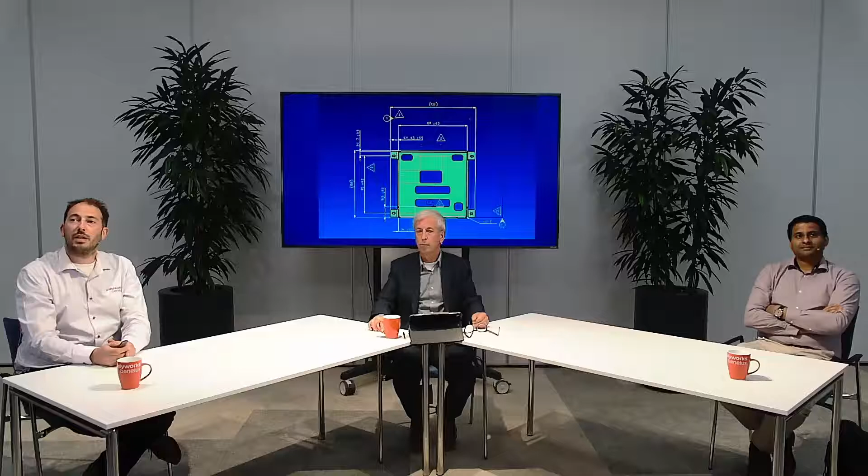I have a presentation, I guess. Some help. This is the model-based definition. This is the one I'm looking for. Yep, good.

Welcome. First, let me introduce to you what Polyworks is. We are a supplier of 3D metrology software. Not only 3D, also 2D, but our main focus is on 3D metrology software. We are able to use our software with different types of machines, different types of CMM machines, scanning devices, large scale, small scale, and we are trying to exchange or distribute the data so everybody can use it for a proper analysis of their parts. And the easier it works, the better it is, of course.

So if we go to the next sheet. Like I said before, we are a supplier of building blocks. In the process you have different steps: one is acquisition, another is the request of what kind of data you have. That's what we're talking about today with the model-based definition. But also the sharing of data, and also statistical process control, like Ajith mentioned, and FAI, or first article inspections. Those are all different building blocks and how we can get there.

The goal is, well, first let me explain who we are. We are Polyworks Benelux, located in the Netherlands. We've been active since 2015 with 6 employees, and we are a subsidiary of InnovMetric. InnovMetric is a Canadian company started in '94 with a global presence of about 500 people, and we have an active, direct presence in 21 countries. If we count also the non-direct presence, we are in about 30 or 32 countries.

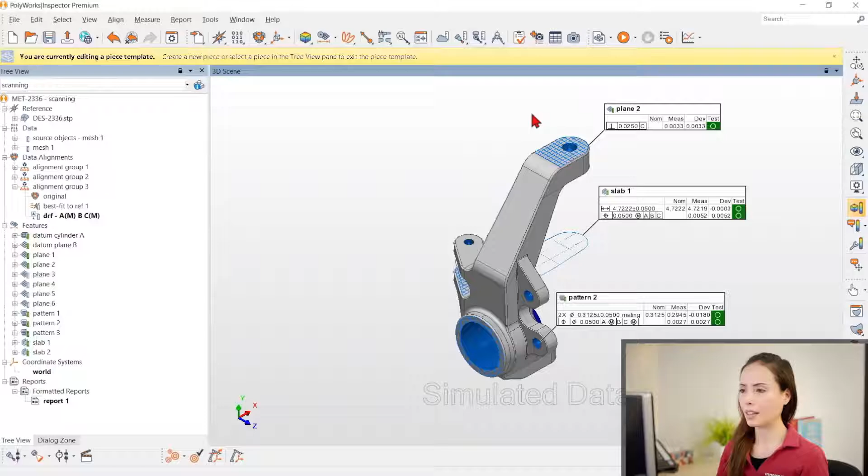As a senior application specialist, one of my roles is to prepare inspection projects based on engineering dimensional requirements and analyze the results once the parts are measured. Here, I have prepared a measurement plan to inspect the first 5 produced samples of this part, and I am targeting a portable scanner as the measurement device. The plan includes all the critical dimensions, the measurement steps needed to collect the data, and the inspection report is also ready.

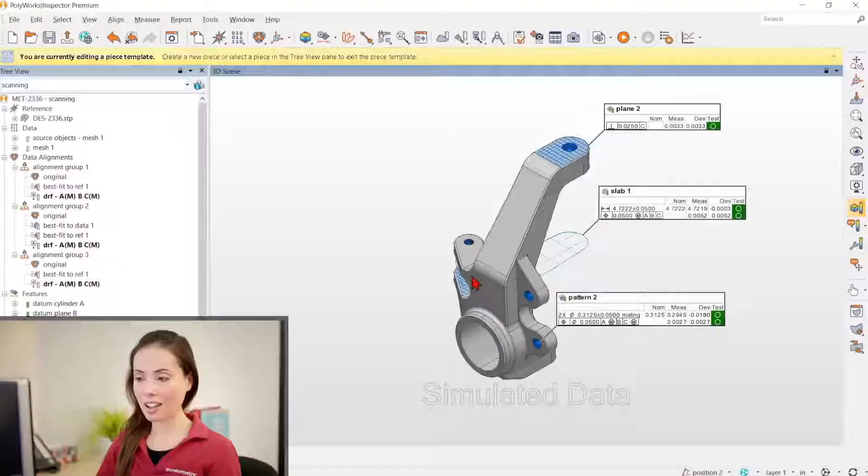To share this plan with my colleague down in the metrology lab, all I need to do is upload the project to Polyworks Data Loop. Being able to make my work available to my colleagues with a few clicks, without ever leaving the Polyworks Inspector interface, has completely changed the way we manage our inspection project files. I no longer need to put files in dedicated folders, keep track of versions, or validate that people involved have access to the files. I upload to Data Loop, and the latest version is instantly available to anyone involved in the process. And as if this was not awesome enough, I can send a direct link, in this case to Jeff, who will be inspecting the samples, to easily access the project and provide additional information if needed.

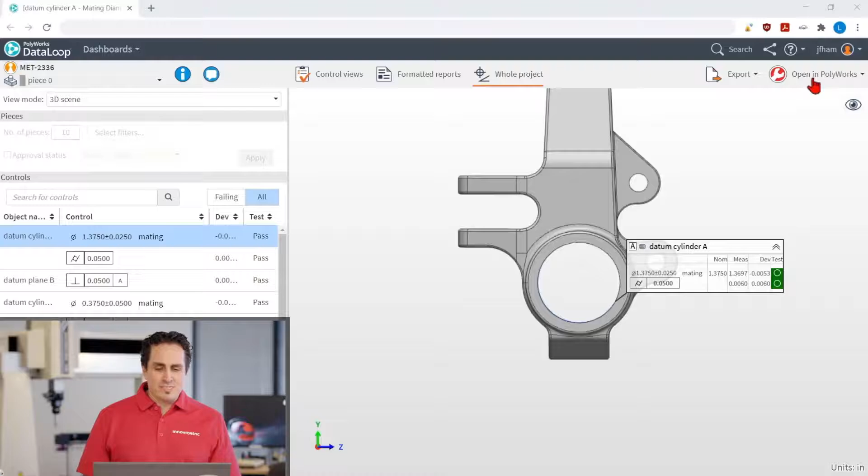Being a Polyworks application specialist means having the privilege to work with almost any metrology hardware that exists. I know I'm a lucky guy. I'm currently working on a project with my colleague Amanda to inspect some samples of this part. She was assigned to prepare the inspection project, and I will be assisting her in collecting the data. Oh, it seems she's already finished, and the ball is in my court now. I truly love these direct links to projects. I'm no longer browsing for files and making sure I'm opening the right file, or even the right version of it. I know it might sound lazy, but I don't even need to know the name of the file. I just click the link, and the project opens in the Polyworks Data Loop web interface. So, I'm going to get my hands on it right away.

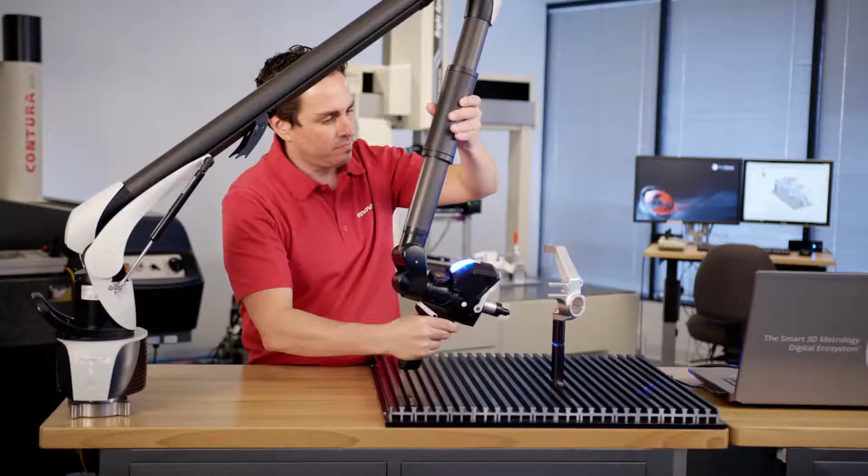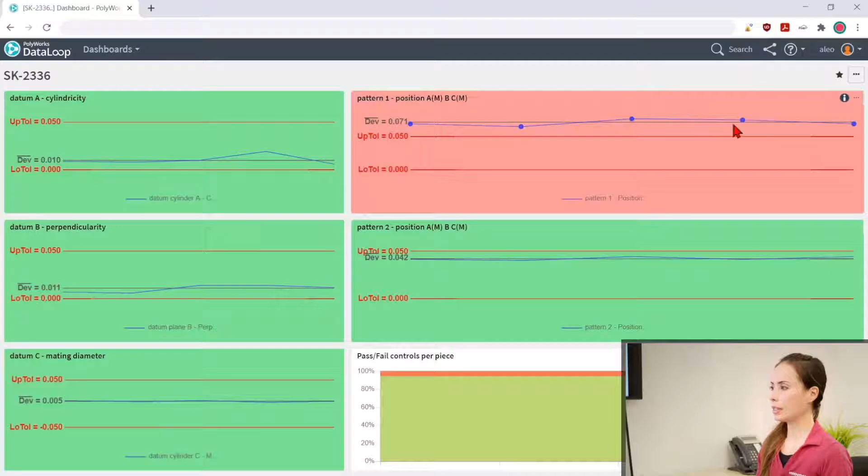While Jeff measures the parts, I have customized the dashboard in Data Loop web interface to closely monitor critical dimensions. This will allow me to see the results as they come in and quickly see if any are failing or on an abnormal trend. Now that Jeff has uploaded all the data for the inspected pieces, I can see most of the critical dimensions are good, except pattern 1, which is failing in all 5 parts. Let me take a more detailed look at this pattern. Yes, now I remember, these are the ones that were challenging to drill. I will alert Matt about this. Matt is the main contact with our suppliers when we need to manufacture parts and has a solid background in different manufacturing processes. He will help us determine what is wrong and what will be the best thing to do.

It seems we have a little issue with the first produced samples. Amanda is saying that some dimensions are consistently failing. Let's see what the issue is.

Yes, these holes are not looking good. I was afraid this might happen since our supplier had some initial difficulties setting up the equipment necessary to drill these at the proper location.

As of now, we know their position is failing, but to be able to correct this issue with our supplier, I need to know in exactly which direction these holes are deviating and by how much.

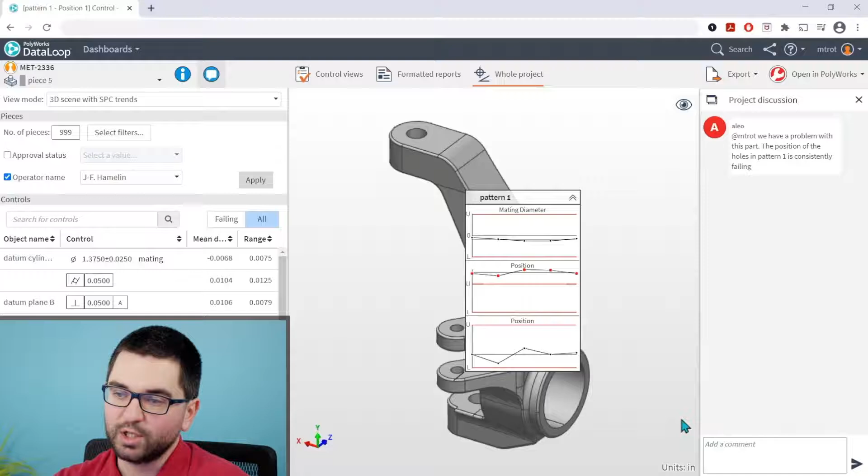Amanda is super cautious with her projects, and she's the only one with permissions to edit them. So I'll ask her to include the coordinates of those holes for all the 5 pieces.

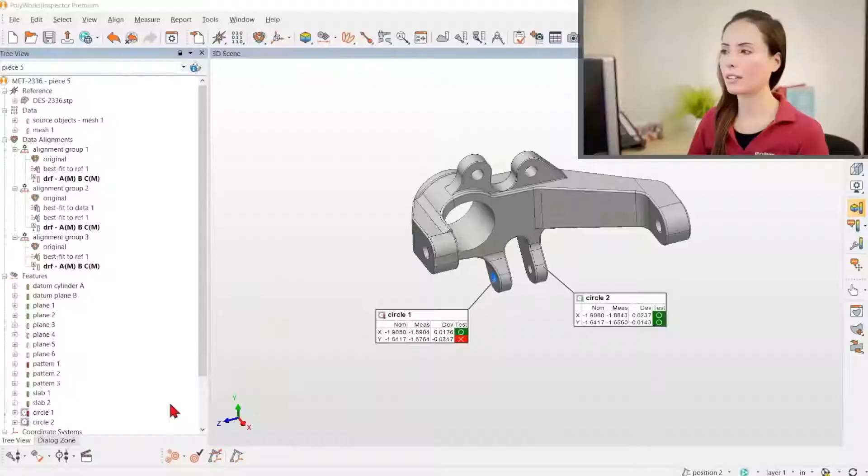As requested by Matt, I have added the values he needs to the current piece, and I can propagate these changes to existing pieces in no time.

For the record, whatever Matt told you about me being a control freak is not true. I'm just exploring the benefits of collaborating while being in control of the process at the same time.

Let me just add Matt to check these values.

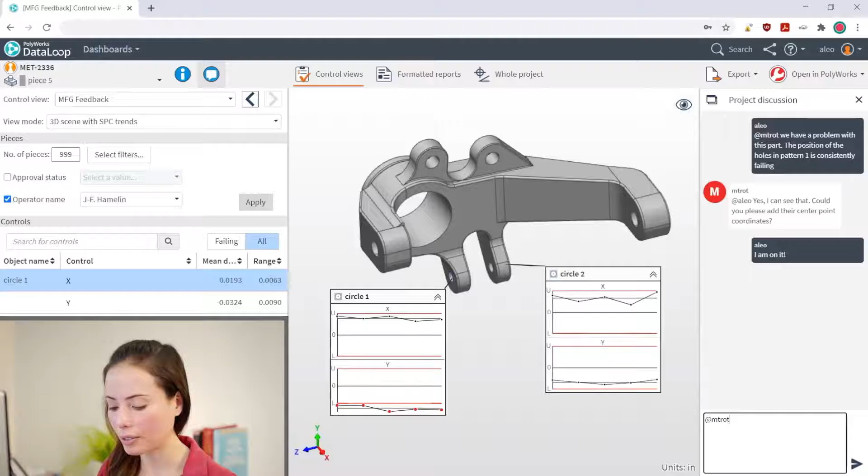Great! Amanda is so methodical. A dedicated control view. Well, it definitely speeds up the review, and I can confirm there is a consistent trend for the coordinates of the holes.

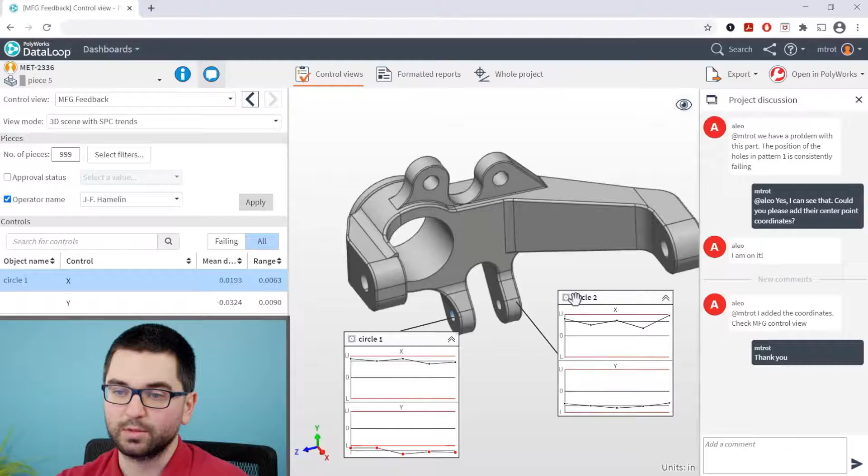I will tag our supplier so they can access the data and make the necessary adjustments to the process. They will be able to manufacture the next batch of samples with the corrections.

We have received a new batch, a total of 20 new samples to inspect, manufactured after the corrections. Having to inspect a larger batch of pieces, we have decided to use one of our CMMs to speed up the process.

I can adjust the original plan to inspect the new samples with it, and the assisted sequencing technology allows me to do this very quickly.

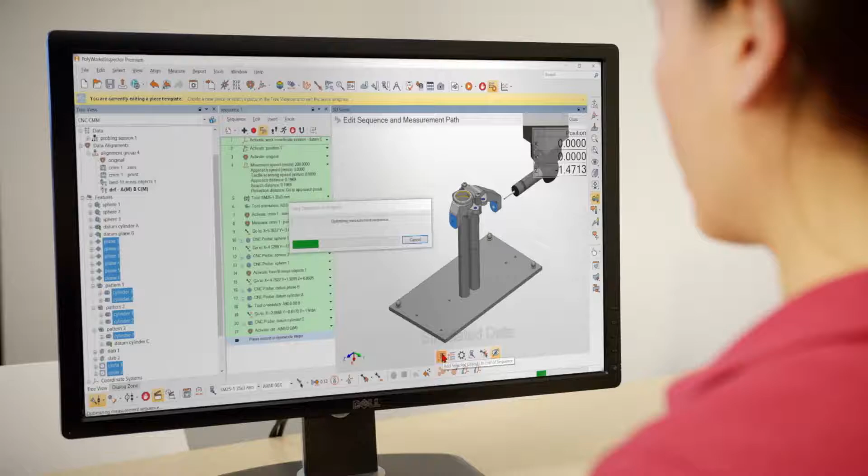I can update the project with an upload to DataLoop. And now Jeff can have some fun with the CMM.

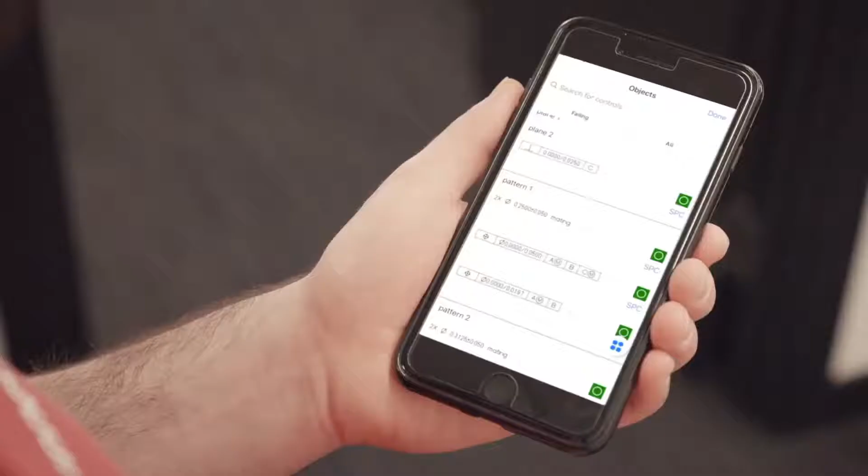It seems like the adjustments made to the manufacturing process worked perfectly. The position on the new 20 pieces looks great.

Thanks to the values provided by Amanda, our supplier corrected the machine path and was able to get the right position so we can move on to the next challenge.

Yes. Well, you just saw a video where we tried to explain the framework of PolyWorks and where model-based definition can be really beneficial. So what we just saw was the measurement request, the sharing of measurement data, but also quickly analyze that specific data, modify it on the request, and eventually, in combination with the supplier, change the part or make modifications, get new samples in and measure them on a different type of machine again.

And what is the big benefit for model-based definition in this case? To set up the specific question. Because you have to interpret the data from a drawing, you have to convert it to a 3D model.

Then you have to add some data to it and administrative tools like the bubble ballooning numbers, the GD&T stuff, the tolerances. That's quite labor intensive, and it's already been done. So that is a bit of a waste of your time.

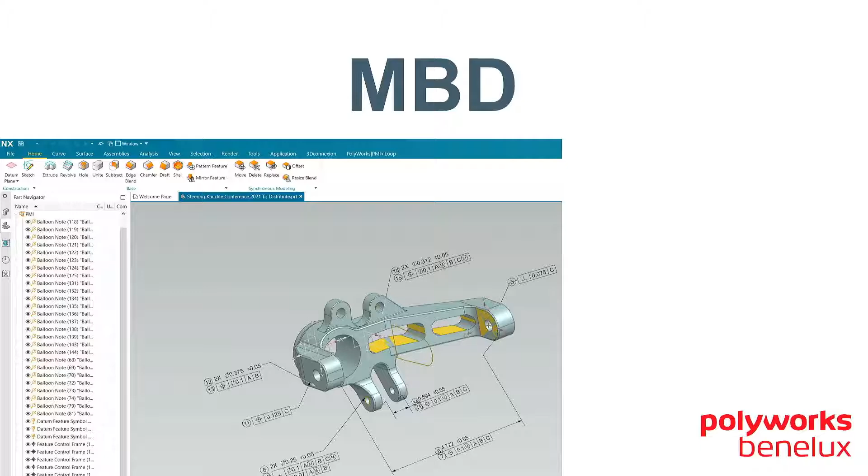And because we are working in this example in NX software, it's possible to add balloon numbers, the GD&T, the callouts, but even better, you can also use the reporting directly in it.

So now we're going to look at the next video, and in the next video it's going to be explained step by step how we can add that data using NX in this example, Siemens NX, and the Polyworks plugin. Here you go.

Throughout my career, I've worked with many CAD solutions and developed solid skills in the mechanical design area, which is why I participate in the design phase of our parts.

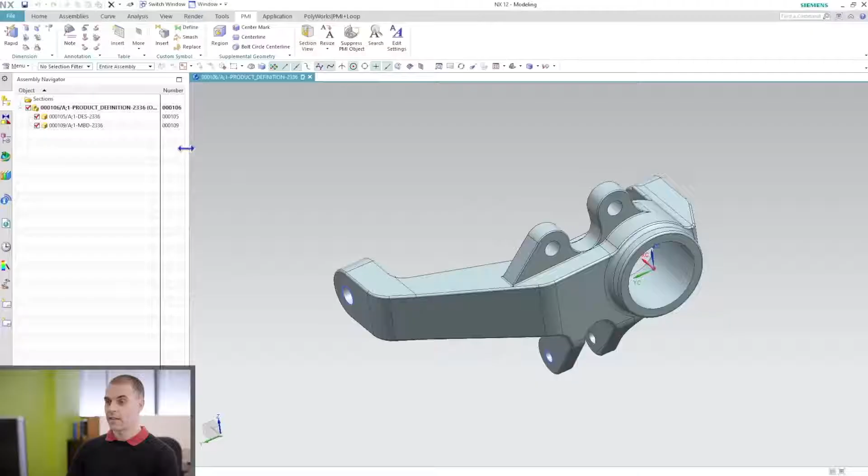Typically, once the 3D design of a part is completed, the next step is to proceed with the model-based definition. To do so, I have here a derived part where all the key design characteristics and manufacturing feedback will be defined. I know it's not common practice to add this specification to the same part, but we are exploring a new collaborative strategy.

Now, using native tools, I will define the most critical dimensions along with their tolerances.

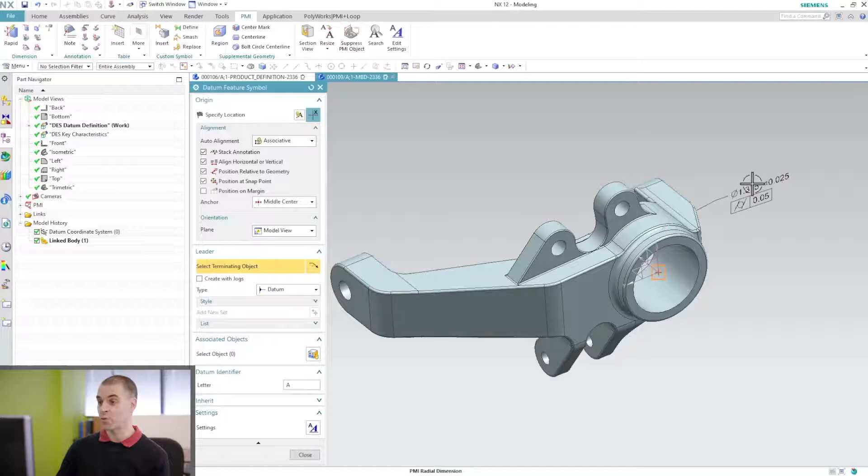Since this model-based definition represents the single source of truth, defining a control plan from the very beginning will save hours of work for my colleagues who are tasked with handling the manufacturing and the inspection of the part.

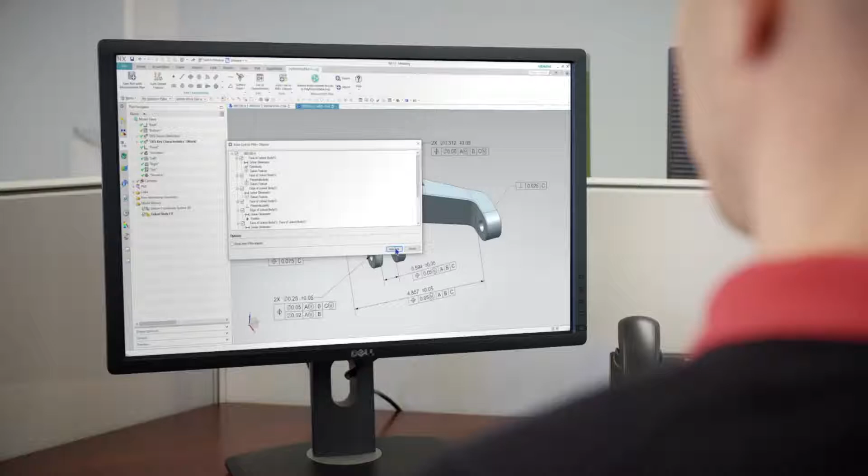Using the Polyworks PMI Plus Loop application, which I can access directly from my CAD software interface, I can enhance the native PMI by linking measurement objects to each characteristic. And just like that, the Polyworks measurement objects are added to the structure of the CAD file.

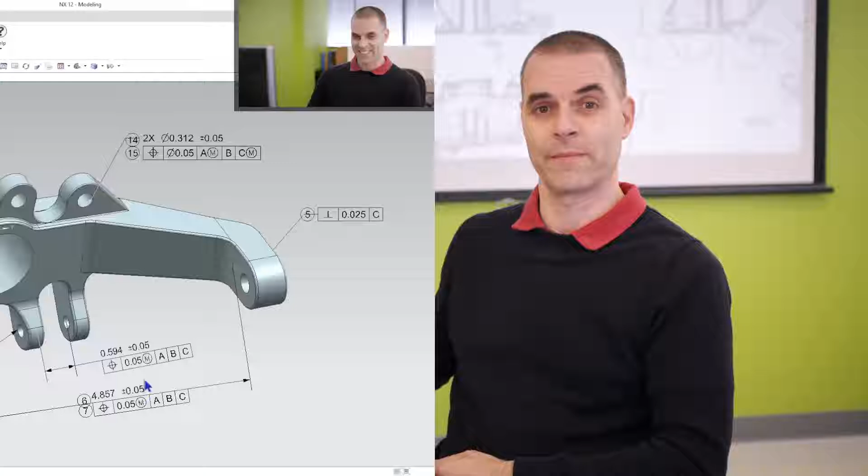And I can review the associated characteristics and assign them a digital unique identifier, which is critical for traceability purposes. It is a one-click operation that identifies all the selected characteristics almost instantly, saving me a lot of clicks and time. Finally, saving the part with the PMI plus loop control plan embeds in a single CAD file the native PMI associated with measurement objects, where each characteristic is uniquely identified, leaving no room for assumptions or personal interpretation downstream.

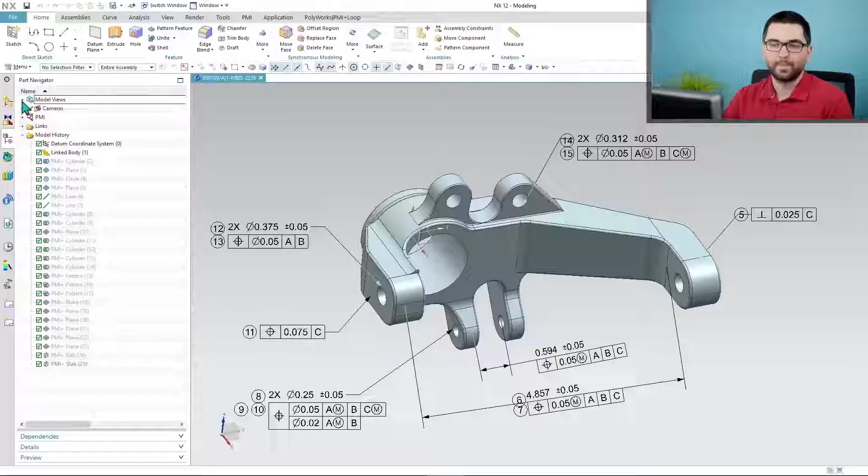Based on my experience with different manufacturing processes, I'm usually the one in contact with our suppliers when it's time to manufacture parts. I know that complementing the control plan with the specifications needed to feed the manufacturing process minimizes errors and the time it takes to set up the equipment. This usually starts with the definition of work coordinate systems that will be used by the machining tool to fabricate this part, which is typically required to associate the characteristics to the proper context.

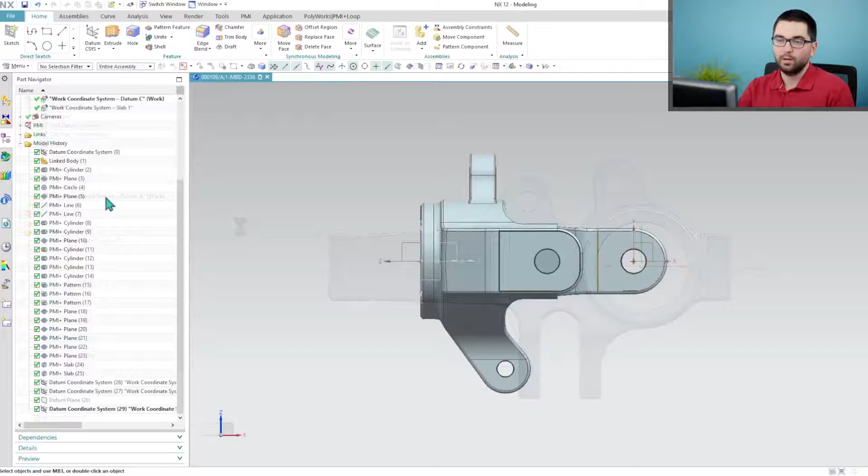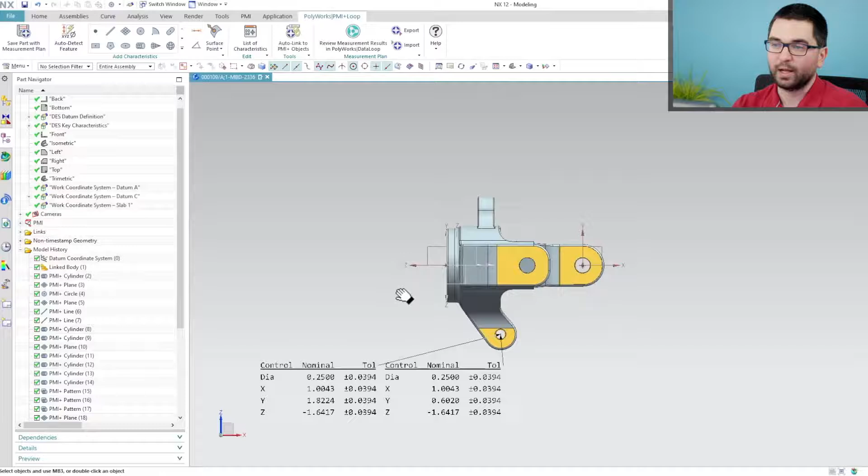Then I can add the characteristics that I need to monitor the consistency of the manufacturing process. Here I will focus on adding the center points of the holes and the midpoint of slabs, and I can do this using the Polyworks PMI plus loop tools directly. Being more familiar with Polyworks than with CAD platforms, this simplifies the process for me.

The usage experience of these tools is very similar to their counterparts in Polyworks Inspector. And when I think about it, if your case is opposite of mine, this is a very nice introduction to the way these tools work in Polyworks Inspector. You are building up a new set of skills without even noticing it.

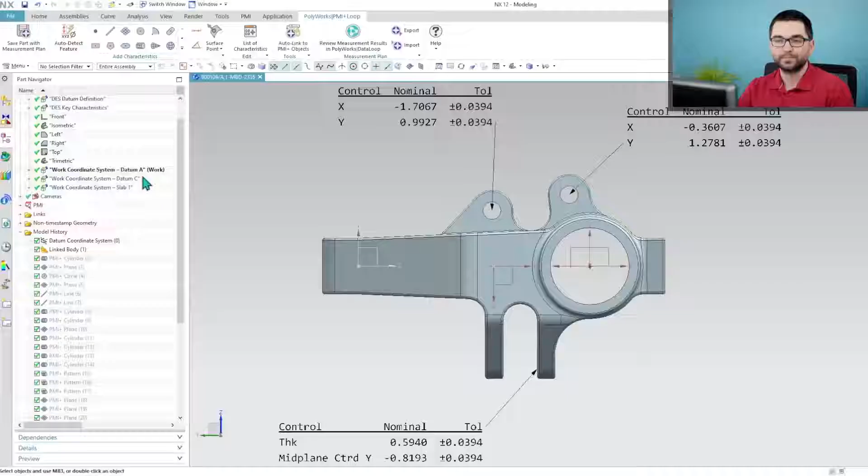With this, I can say with confidence that the control plan is fully defined with design and manufacturing requirements, which makes this part ready to be released. And if any issues are detected when measuring the pieces, we will be able to correct them immediately, this way optimizing the time it takes to troubleshoot the manufacturing process.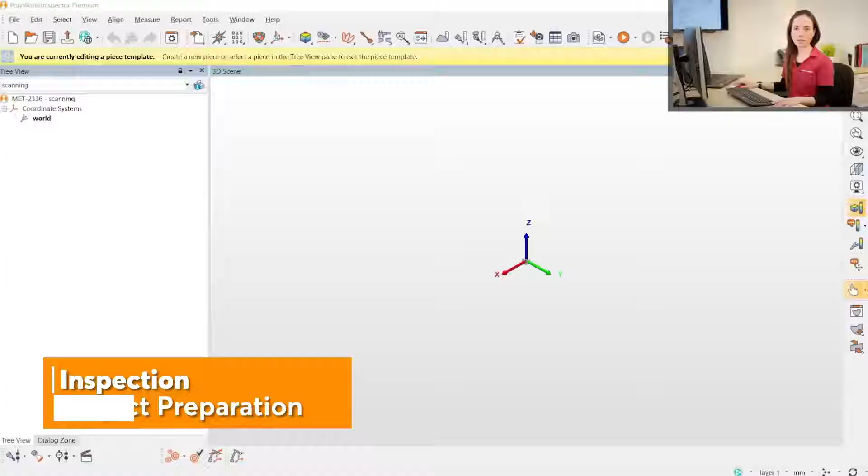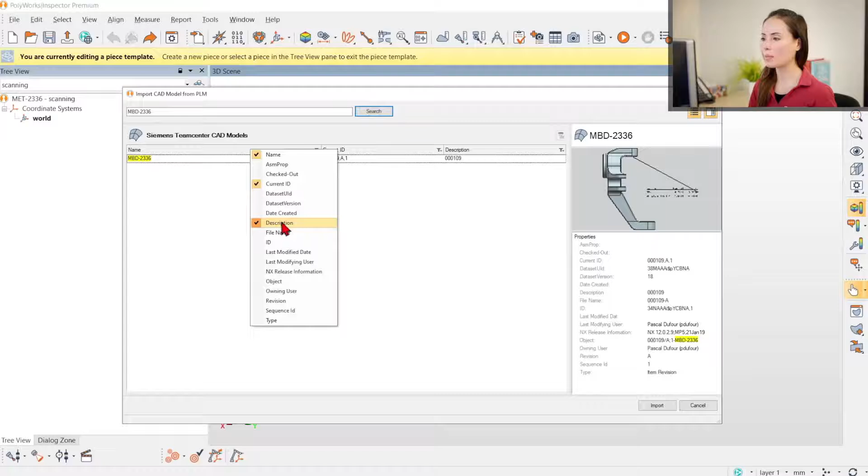To prepare inspection projects based on engineering dimensional requirements, I can retrieve the CAD model of the part directly from the PLM system, which is amazing because I have access to the single source of truth without leaving the Polyworks interface. So no standalone files or PLM browsing for me. And not only that, but having a direct connection to the PLM gives me access to all the properties, and I can enable the key ones we typically use for traceability, and they will be added automatically as piece properties in the project.

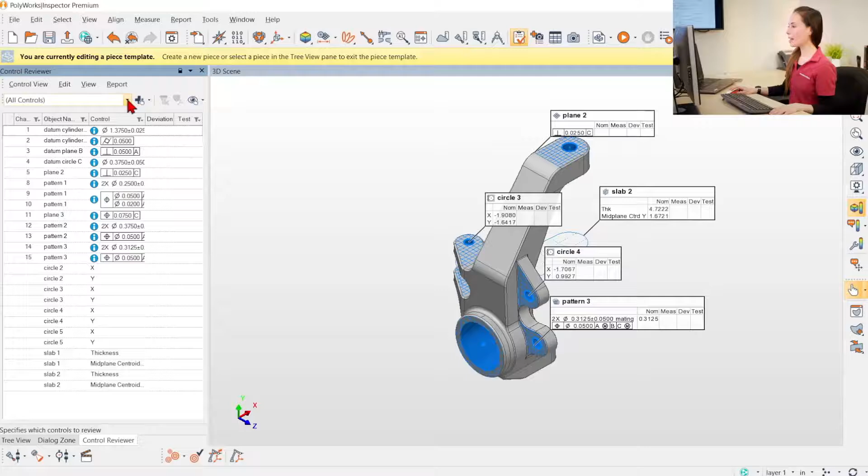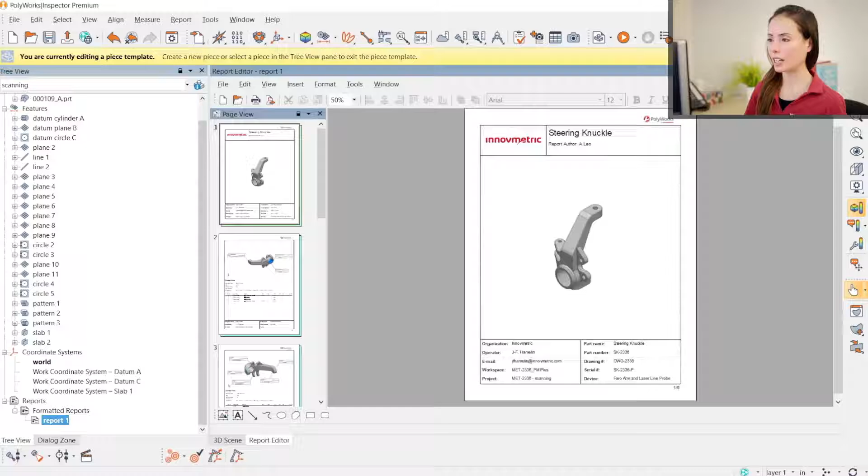Now hold tight, because this is just getting better and better. The essence of model-based definition is creating 3D models that contain all the data needed to define a part. Thanks to the PMI plus loop control plan embedded into the CAD file, both design and manufacturing dimensional specifications are part of the import operation and fully compatible with the structure of Polyworks Inspector projects. The formatted report, including the control views, is also automatically added. From here, all I need to do is focus on defining how this is going to be measured and generating the measurement sequence steps that will be used by one of my colleagues down in the metrology lab.

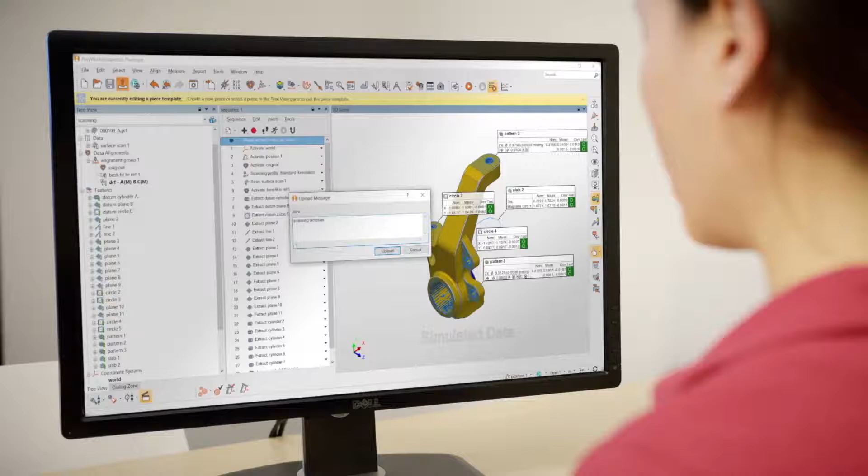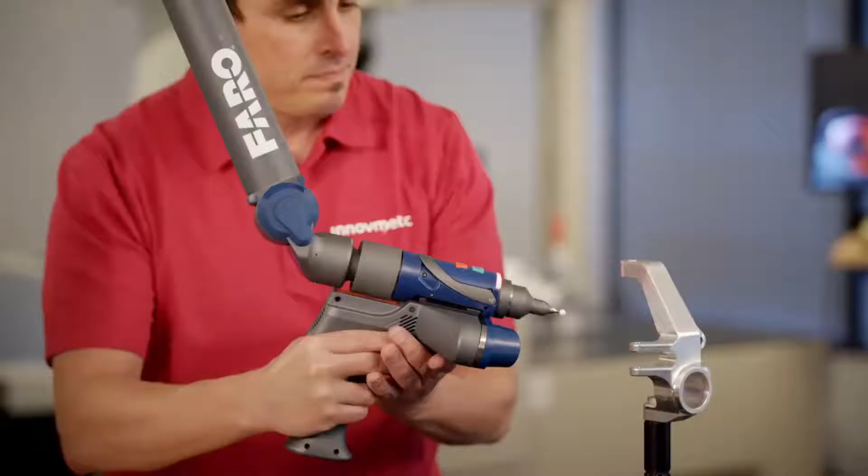Yes, thank you. I hope you saw the video about the model-based definition.

The idea behind model-based definition is that you really eliminate a lot of double work, and I think the most important part is you have a single source of truth. We already discussed it a little bit before the webinar, that this makes a really big difference, because you don't have revisions. Well, you do have revisions, but you always know you have the latest one, because you take them out of the same source as the data. So you always have the latest one.

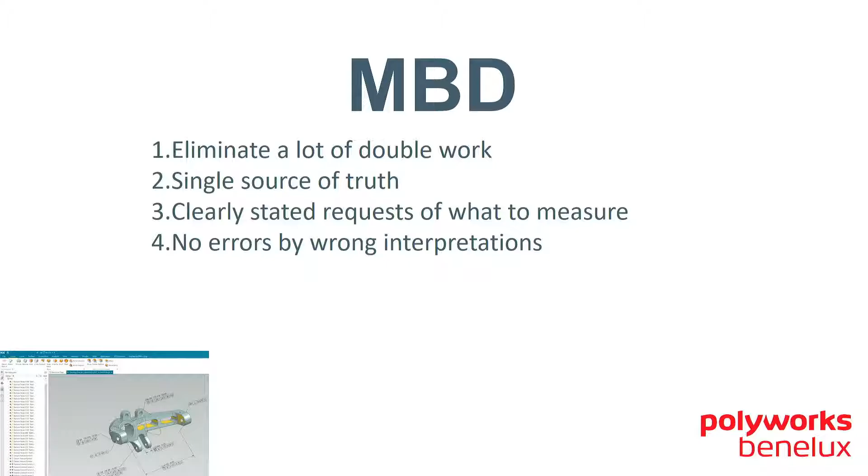You saw that Polyworks will be working together with Siemens NX for the plugin for the PMI tools. It will use native PMI tools and convert them to Polyworks tools because it's a plugin in the native software. It will be combined with Teamcenter, so we can save the data in one file, not a separate file like in a previous presentation. Now it has evolved to one file. But we will also do it with Creo and Windchill, and of course SolidWorks.

Good, this was a little bit of the presentation about Polyworks. Okay, and thank you, Mark, for this presentation so far. Thank you. You're welcome.